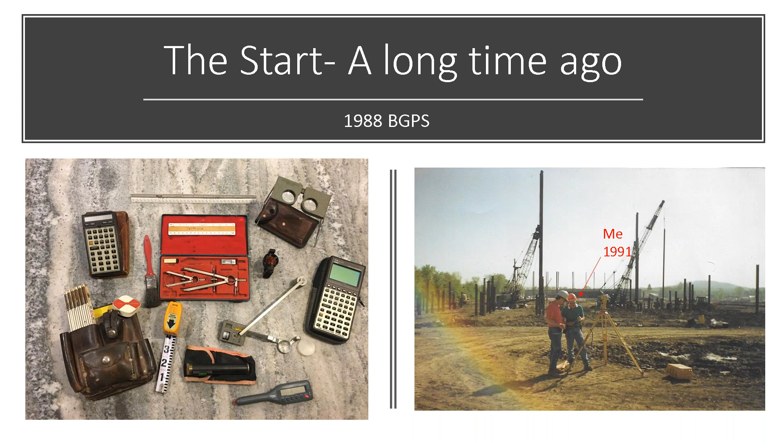What I do today is a lot of drone technology, training on how to fly drones, proper setup of your site with GCPs, making sure your GCPs are inside your flight, to processing the drone data through UAS Master, and beta testing 5.4 right now, where you'll be able to process your DJI drone data directly inside 5.4.

That's going to be a game changer. I also do custom corporate training. Here's a very large company, countrywide in the United States, that paid me for a month to come in every Friday and Saturday, and I trained every single division of their company on the use of Business Center.

To me speaking here at Trimble Dimensions, this one is on tips and tricks of 3D modeling. That was one of the things I did for years before SITECH took me on.

And I've been starting to get into the lecture scene at colleges. I did a lecture at ASU, Arizona State University, a couple of weeks ago, and spoke to the project management division about the uses of Trimble Business Center software and how to make a company successful, and why the old saying cash is king is incorrect. It should be cash flow is king.

So that's a little bit about me, but we're going to talk about what's going on for today's webinar, and this is going to be covering underground utilities. This is a big business. It's always been big, even from the days that I started, back in 1988. We've always needed to perform some form of as-built information.

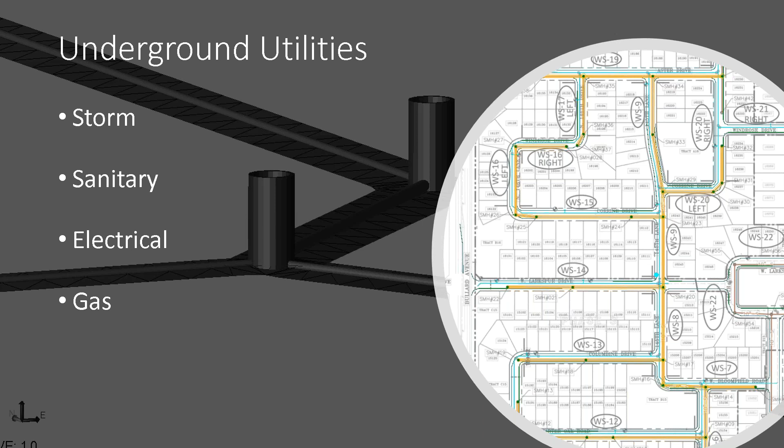So we're talking about storm, sanitary, electrical, gas, water, and communication lines. Some of these are open trenched, where you can do multiple ways of getting as-built, and some are trenches that are backfilled at the same time the lines are put in. That can become part of a daunting task of trying to figure out how to get an as-built done.

But with this technology, what you can see here and the as-builts we're going to talk about, you can come in with the site module of Trimble Business Center, build your pipe network, then take your as-built information from the field, and if you have line work, use the utility module to actually recreate the as-built information. So now you can have a 3D representation of your as-builts and a 3D representation of where the lines were supposed to be based upon the design.

And now you have multiple ways of visualizing and presenting to whatever entity you need to in regards to where the utilities are set.

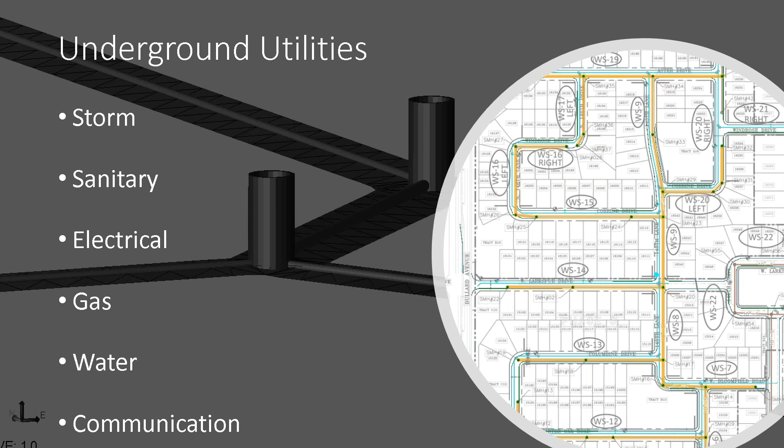Well, the project we're going to be talking about is something very unique. KAE was brought in to do a fiber optic line at the border wall in Arizona. The beautiful part is we were able to make our technology work here. You can see we have a head right here on the plow, and the spool of cable coming down, and they were burying the line at the exact same time they were plowing it in.

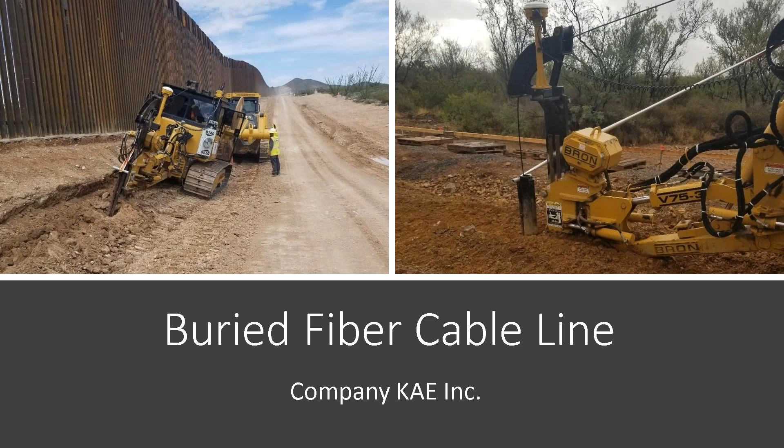So we had some requirements to meet. The project requirements were they needed to know the exact location of the fiber at burial. If you remember this picture, it was being buried the exact same time it was going in, so we needed to know that. We had to solve that question.

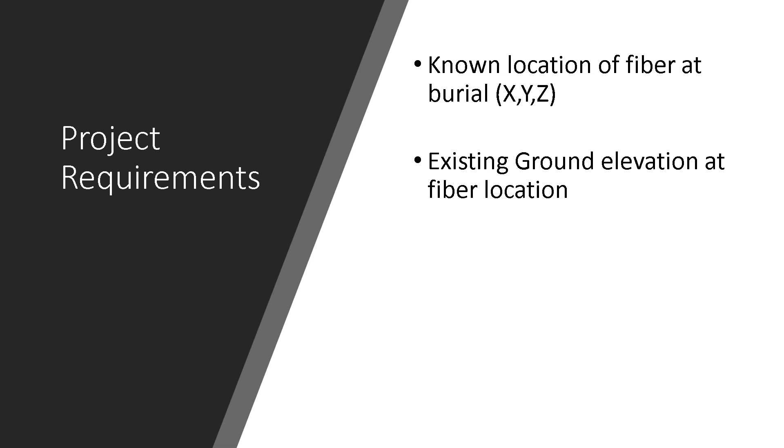The next thing they needed was a ground elevation at the fiber location. Another requirement was they wanted to know the depth of the fiber to finished design grade, because they had certain requirements that had to be met, to make sure these requirements were met in the field based upon the design location and where they were putting the fiber in.

Now, due to the ground out there, and I'll let the guys from KAE speak in a couple of seconds and explain what they were dealing with on the ground, it wasn't just a straightforward case of going along the line and putting it in. They hit some rock situations, and there was some existing burial of other foundations that nobody knew about.

So we had to actually relocate on the fly where that line was going. With the technology we came up with, we were able to know exactly where that line was placed, even when we had to make changes on the fly in the field, and then supply as-builts of the required information. So here are the requirements, and based on the technology I'm going to show you, this is what we were able to meet.

I'd like to give Adrian and Cyrus a little time here to speak about some of the issues they were concerned with when they knew they had to meet these requirements, until we were able to get this technology working. So I'm going to pass it over to them - if they can chirp in, fill us in a little, give us more scope for the project, and then I'll continue on.

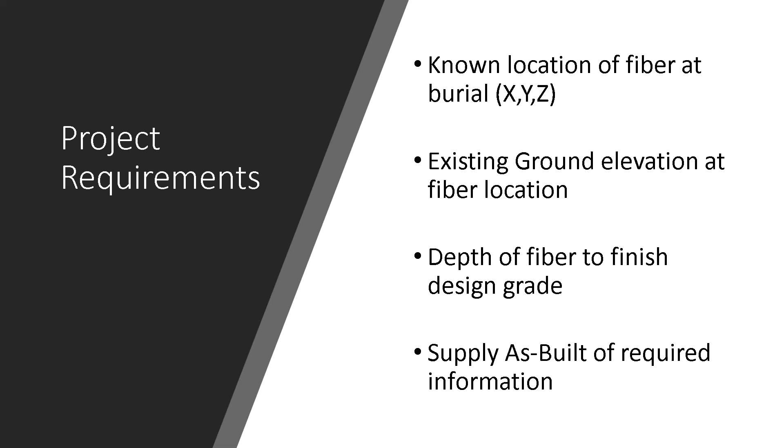So here are the requirements, and the software we use to generate this information, as you can see here, is Trimble Business Center - it's the hub. It's where the design came in, and where the files came in from the contractor that KAE was working for. We were able to compile all of that in Business Center, and from there we were able to push that out to the field and put it into the machines.

And then from the machines, it came into WorksOS, where on a daily basis anybody can log in and see where they're working, and get quick reviews based on where the line is relative to the design surface, to see if they're meeting requirements before you even start bringing in your as-built information. Then right from WorksOS, we were bringing it back into Business Center, which is where we were creating the as-built information.

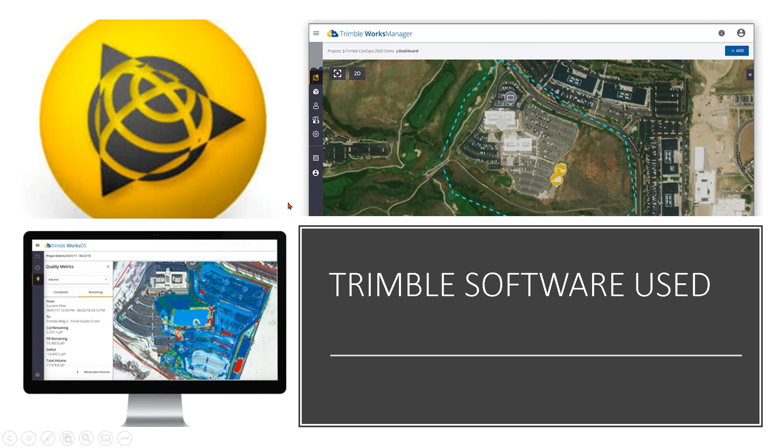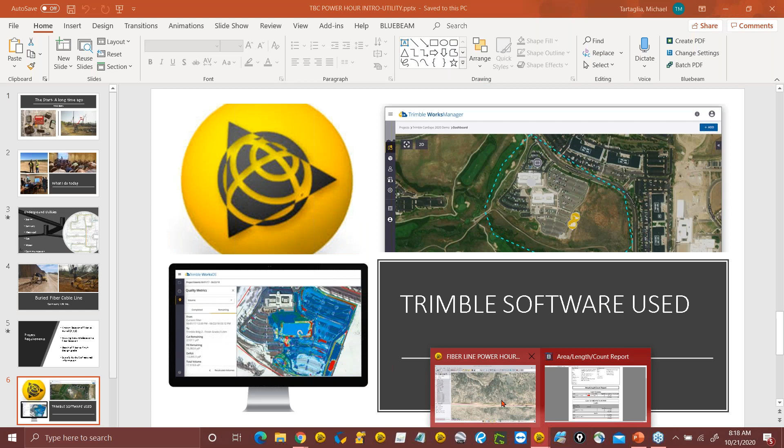So as you can see here, this is what I call the triangle of success for really any construction company. This is where you're going to know if cash is king or cash flow is king - it's right through this trio, and it's going to help you out immensely. These are the three products I'm going to be talking about in the upcoming part of my presentation, so I'm going to flip over now and come into Business Center, which is the hub of everything here.

So using Business Center is a fabulous tool, and we use it for everything, and it can be used for everything. Now, the key thing is when you do things like this, you need to be very well organized. I gotta admit, one of the most daunting tasks of me working with Adrian at KAE was getting the setup, getting the layers correct, so everything came in correctly, getting organized on the management.

Now, this isn't their full project. This is something that I was working with them on, so I took part of their project and was working with it. But what you'll see here is the use of groups to keep everything organized.

So you can see right here, everything is done by date. Very important for what we're going to be needing to extract from this information. So by Adrian having this information all nice, neat, and organized, if Cyrus needed to come to him and say, hey, I need to know on this particular date, can you pull me information like what Cyrus mentioned? Adrian can go in, he can pull him anything that he needed right there at his fingertips.

Again, this could be done on a daily basis because with the use of WorksOS and WorksManager and Business Center, at the end of the day, all that information from the machine and the data collector could already be pushed right into Business Center. So there have been times where Adrian has come in the next morning and has produced as-built information for what they did the day before.

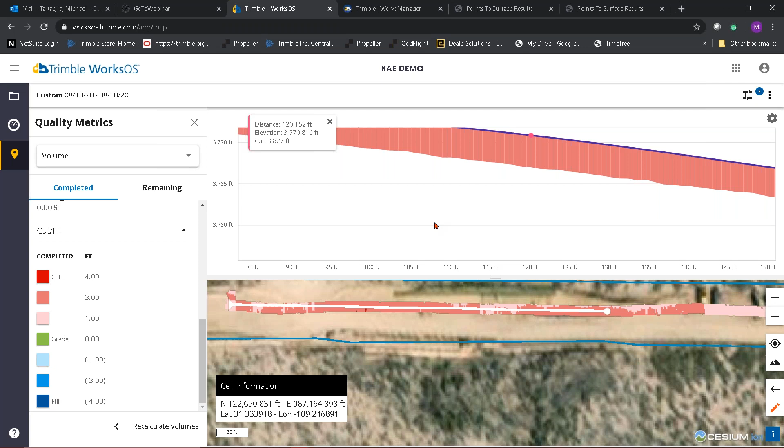So here, you're going to be able to get a visual very quickly on what is actually taking place in the field. Also, the cool thing about this is they're going to be able to monitor the equipment, the time of day, and the elevation, and they'll be able to follow the direction. You can see here, by looking at the timestamp, how fast they're actually moving, putting this line in the ground. So you're going to be able to get this real-time information coming in to here from the machine, so now you can monitor this.

Now, what everybody's probably saying is, hey, this trench looks a little wide for that plow. And yes, it is. The reason for that is, if we went back to the picture of the plow, you see how skinny that plow is—it's very hard to find and monitor. So what we did is we took that edge of the plow, and the center of the plow, and projected those same points out for a certain number of feet. We were able to visually see this, because when you're zoomed in and you have something that's only 6 inches wide, you're not going to be able to find it pretty quickly. So we're able to come in and do this.

You also have the ability to set up regions. So I set up a region here, and we can set that up as a filter. If there's a question, I can come in, put a region around here, create a filter, and then call my guy in the field and say, hey, go up here, go to this filter, and it'll zoom them in on the area that I had some concern with.

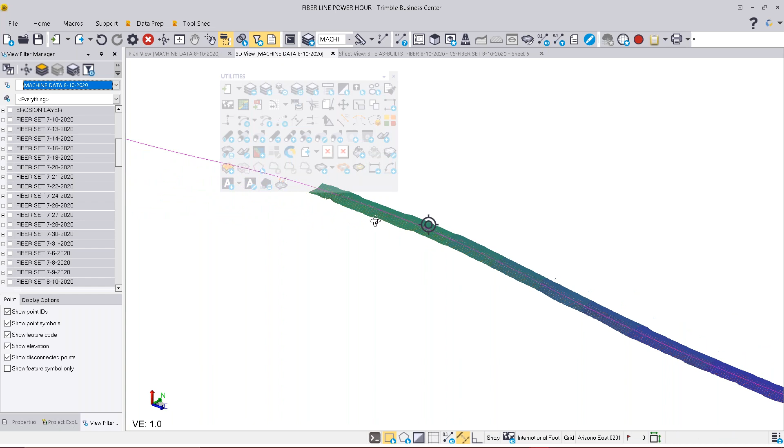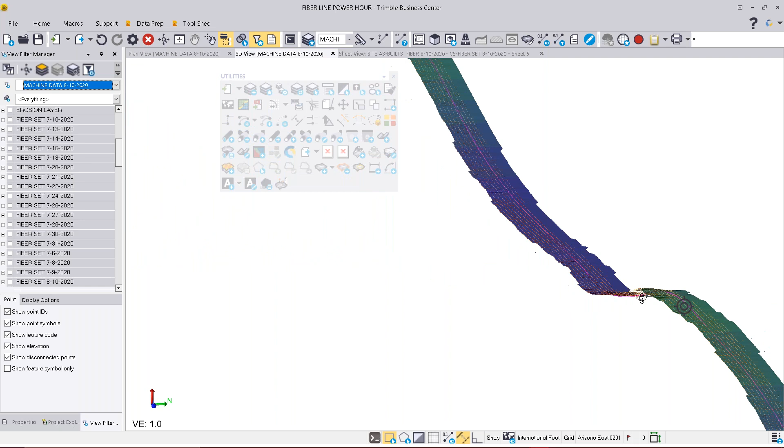From here, we'll take a look at a 3D view. So I'll open up the 3D, and what you'll be able to see here is the design line. The purple is the design line that was given to us from the company that they were working for. You can see that this line right here is set to be at the requirement of the depth that's needed, and the ground changes quite a bit as we are going through here. But if you look at this, you'll see we're pretty much following right along the design of this project with getting this information in. So now from here, we know the X, Y, and Z location of that trench—so we met one requirement.

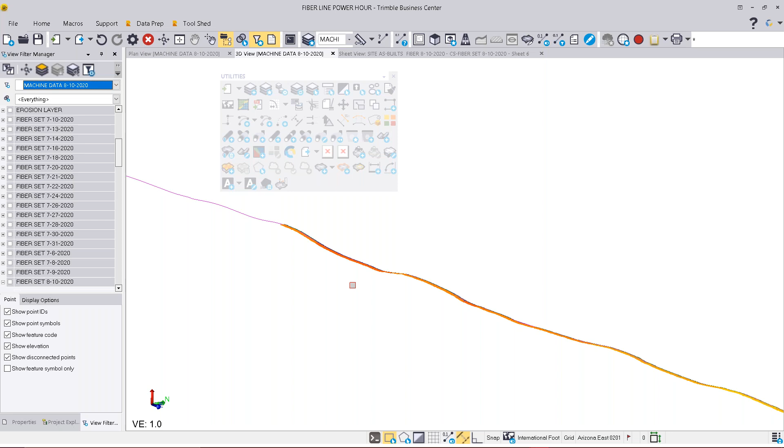We needed to know X, Y, and Z of the depth of that fiber optic line as it was being buried at the same time. So here's requirement number one. We have a visual for that.

What Adrian was able to do at that point in time is now meet requirement number two, which was we need to know what the existing ground is. Anybody out here that's a surveyor that's been out in the field for a while knows that getting ground information is pretty simple. Got the rover today, just fire up the rover and go out and shoot.

So what KAE has is they have a guy out in the field. He will, as they're digging the trench, go out and follow behind and start doing ground shots every 50 feet along the buried part of the trench. So we can now monitor what the ground was at that point in time when the line was buried.

So we're going to come in and we'll start looking at the fiber set. So you see here we have the fiber set for that day. And I'll come down here and here is the fiber location information. I'll just start walking you through really quick the steps and the workflow that Adrian is following.

So because everything is tied into WorksOS, Adrian is able to grab the data collector information and bring the point information into Business Center of where the ground shots were actually taken. So now we have X, Y, and Z on the ground.

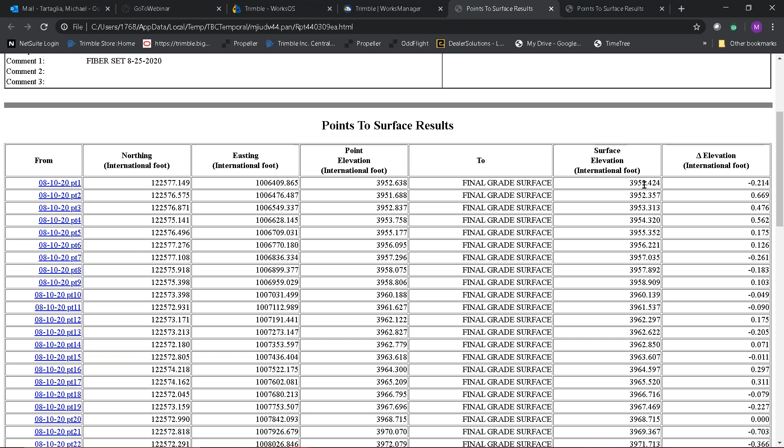Which then showed him the ground shot taken by the surveyor, the northing, easting, and elevation, what it was being compared to, the surface elevation at that location, and what the ground was at the time of burial.

Okay, so he was able to bring this information in and meet requirement number two. This whole process that I'm showing you right now would probably take somebody, after they're trained - and I'll let Adrian speak a little bit about this too - about an hour to 2 hours of time in the morning to get this part done, and you're able to hand over to your overseeing company your as-built information at that point in time.

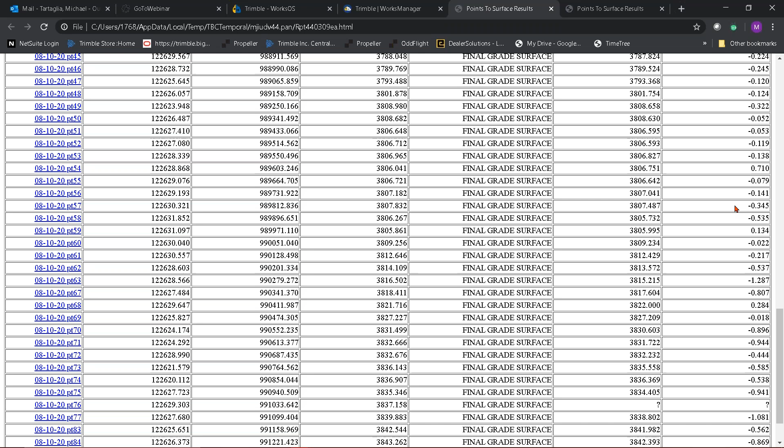So he would create this, then back in Business Center, he would come in, and what we would use is the tool called line string through points. And what we would do at that point in time is create a line of where the ground is.

Now this is going to be important, and you'll see why, because we needed to create other as-built data, as in cross sections as well as profiles. So you'll see here in a few minutes why creating that line is so important.

Now, to meet the requirement, we know the X, Y, and Z of the trench, but now what we need to do is meet the requirement of what is the depth of that particular line that was buried. So what we were able to do is use a tool.

We were able to take this line here, and we dropped it down onto another layer and made it take on the elevation of the surface that was generated by the plow. And what that gave us was our actual line. So now that line has true X, Y, and Z location based upon the surface from the plow.

Once we had that, all Adrian had to do is create fiber points, or points set to the line. So we used the tool where we came in and said points at interval, and he set up an interval, and we created points along that line.

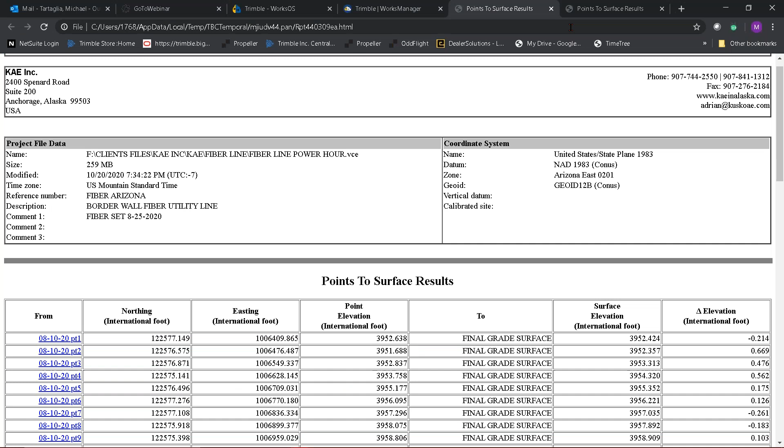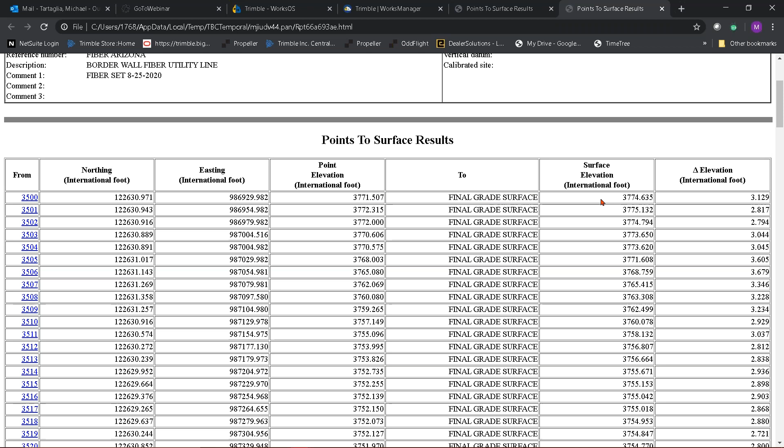From there, we clicked on points to surface, which led us to be able to create this point to surface report. And now what we have is northing, easting, elevation of the actual line based upon true information that came from the machine that was brought in to the design surface, and what the burial was at those locations along that line. So now, just that quickly, they have been able to meet a part of the requirement.

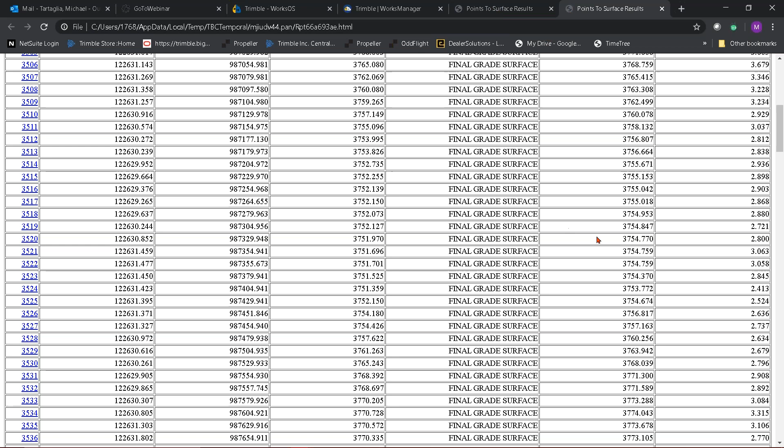I need to have some form of as-built information of what went on. So now Adrian has these two reports. He's able to generate these. From there, he'll come back into Business Center. And because everything is nice and neat on its own layer and layer grouped, he was able to come in and use the area and length report.

He was able to come in, pick the layer or just pick the line, select that he wanted just the length, wanted to display in report view, and what comes up is he was able to instantly get a report. Because everything is organized and layered and grouped correctly, he was able to generate a report of how many lineal feet they did during that time frame on 8/10 on the north side of the project.

What he was able to do is take these two pieces of information, create PDF files for them, send them over to the contractor that they were working for, and meet a requirement of letting them know pretty much on a daily basis where they were and how many lineal feet they did on a daily basis. So with this tool, they were able to meet these particular requirements.

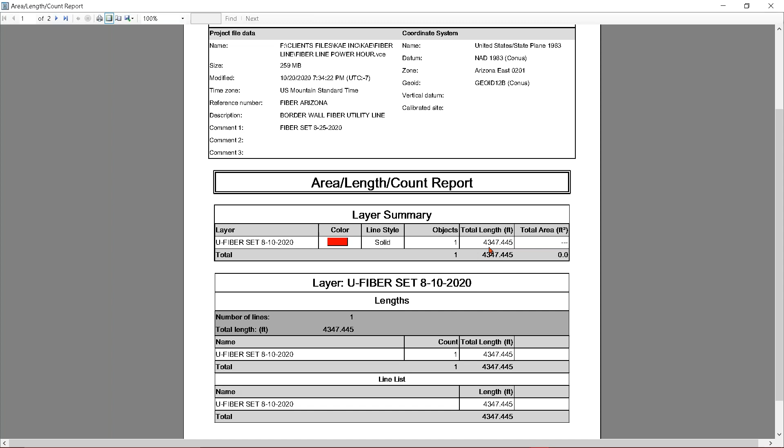Now, the cool part about Business Center here is we can also go in the reverse direction. So if there was any design changes in here, then we would be able to take this and send and publish this right back to, and for some reason my icon is not showing up this morning, we can send this directly back to WorksOS.

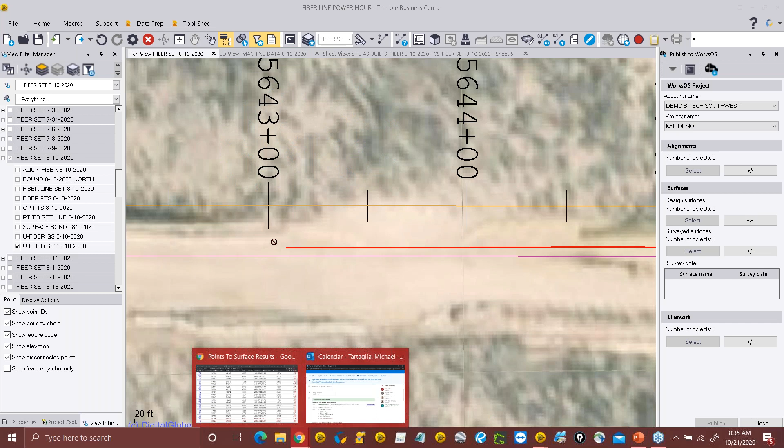So if there's an updated surface and they need to monitor that back in the field over in here, so they're able to get updated depth numbers, they'd be able to do that.

So on any project that you may have that has different designs, let's look at a design build. You've got a design build project, everything is changing on a daily basis. With the use of Business Center and these tools, and you may have underground utilities that you need to monitor, you're able to send things back and forth.

You can also send an updated line file. So if the location changed, we can send a different location, and that could be sent up through WorksOS or WorksManager, and that could be updated in the machine.

So what you're able to do on a daily basis, no matter what you're taking in, or you're taking as-built in, you're modifying designs for better as-built information to go back out because things have changed. The guy in the office is going to be able to, with these three products, control a whole project.

Also, by controlling this whole project, the guy in the office is also going to be able to monitor, are they using the correct surface? Are they using the correct design? As well as the field is going to be able to.

So they would be able to log in and immediately there'd be a yellow flag pop up and say, machine's using old design. So you can call in, call your operator, say, hey, you're using the old design. Stop. Do not put any more utility in. If you start putting the utilities in, you need to switch to the other design.

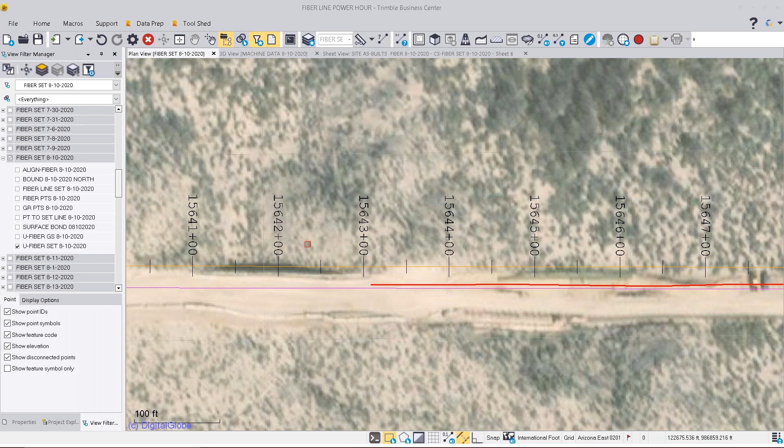So we are now able to not only give the lineal footage of the line of pipe that they did, but now Adrian can also make sure that his starting point and ending point stationing match the starting and ending point stationing of what his site superintendent marked down, based upon the stationing that's marked out into the field. With this information, we were then able to start

creating further as-built information to meet some of the other requirements. Because this is such a long project, over 40 miles worth of work that they had to do, we could not create one solid alignment to handle everything at one time. It was becoming a very daunting task, and it was putting a lot of horsepower and drag onto the computers.

So what we started to do is break everything out into its own alignment. You'll see here that we now have the design set up for an alignment, and we now have the fiber. If I look at this in profile view here, we'll see that this line now follows the exact topography of what they were using to set this on.

And then this had a design elevation on it. So if we take a look at this in horizontal line, we'll take a look at this in profile view here. We can see that this original alignment we used also had the original design requirement elevations on it.

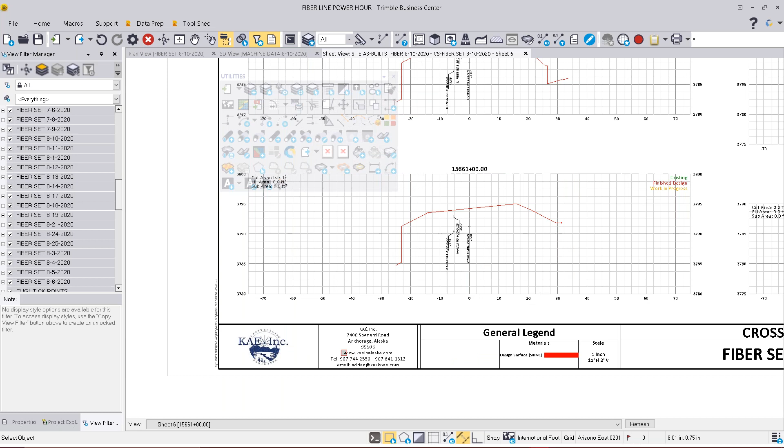What this has allowed us to be able to do, let me come back to my view filter, is create as-built sheets. So I'm going to come in, and right over here, you'll see that we were able to create as-built, with their logo, their company information, the information they wanted in their legend, the scale, cross-section, the date, and their information is all filled out in here.

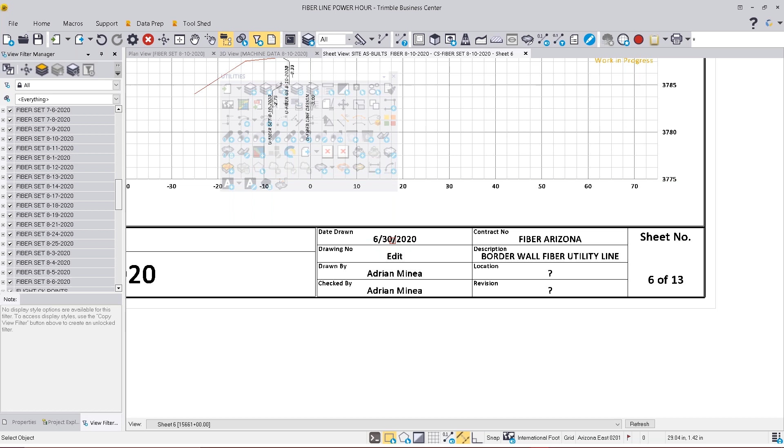My business center is a different date. I forgot to change it. That's why this came out as a different date.

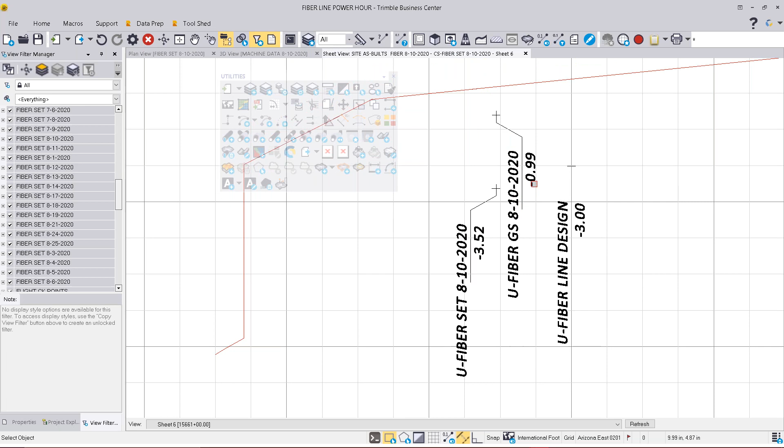What you're going to see by use of this in this cross-section is we can now show, in cross-sectional view at that station, the design fiber set for 3 feet, the fiber set on 810, the depth below the design grade, and where the grade was at the time of placement. We'll be able to do this on every single cross-section.

So not only did we meet the requirement multiple times by doing the surface point to surface report, giving them the area and length report, but now we're also able to generate visuals.

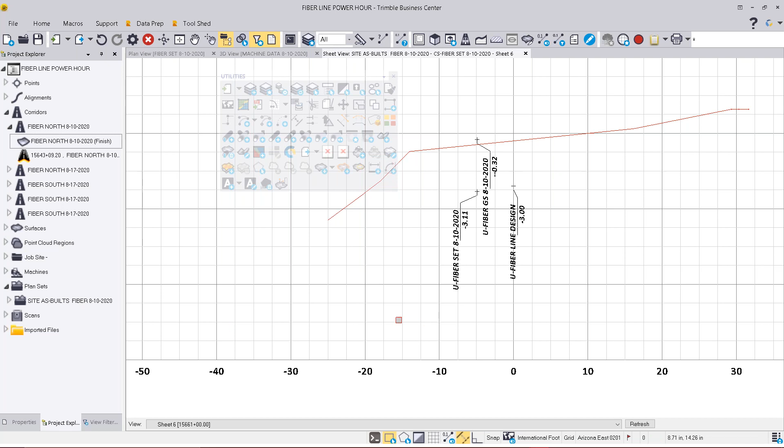Because of Business Center and the way we have this set up and the way we're running this, Adrian is going to be able to, and has been able to, do this on a daily basis. He can print out the points off surface report, do the area and length, then immediately go in, create the corridor, attach those 3 lines to it. Then, since we already have his templates set up and plan sheets developed for him, all he has to do is drop in a new set of plan sheets, set it up for the date he wants, attach the information he needs, and now he has as-built drawings for that day right there, because everything is organized and put into the proper way of generating a project.

Now, to think about this, if I had to do this in the olden days, this would not have been almost on a daily basis. This would have been at the end of the very project of what is going on. So with the technology and what you can do, it is mind blowing.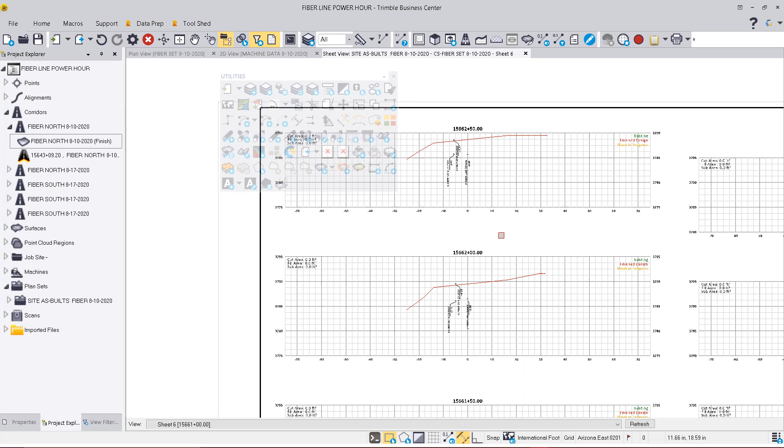If you really have a guy in the field that's ready to embrace the technology, somebody in the office willing to learn and absorb or has Business Center skills, and you work with a very good SITECH and people that really know how the technology works, you'll be able to generate all of this in a heartbeat.

So all our sheets are already created. We can switch over. I'll go to sheet 7, and you'll see here sheet 7 is created. But then what they also wanted, and they needed to have, plan and profile sheets. So I'll come over here and we'll show a plan profile sheet.

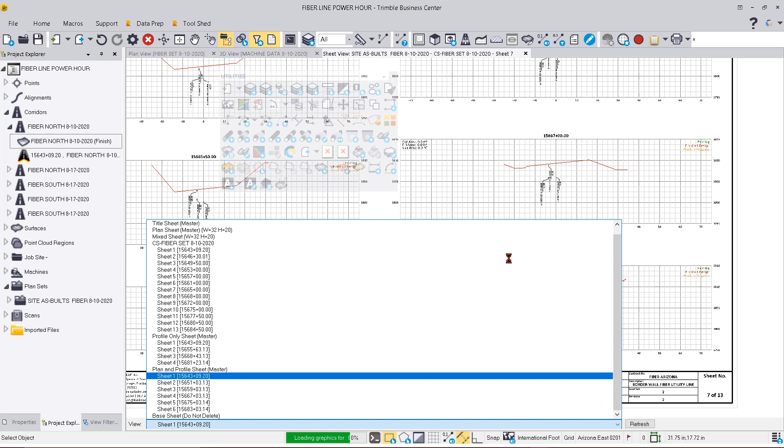You can see that this plan profile sheet is set up with the legend that they want, the scale that this is going to be plotted at. Again, their information is in here. And what you'll see in here is...

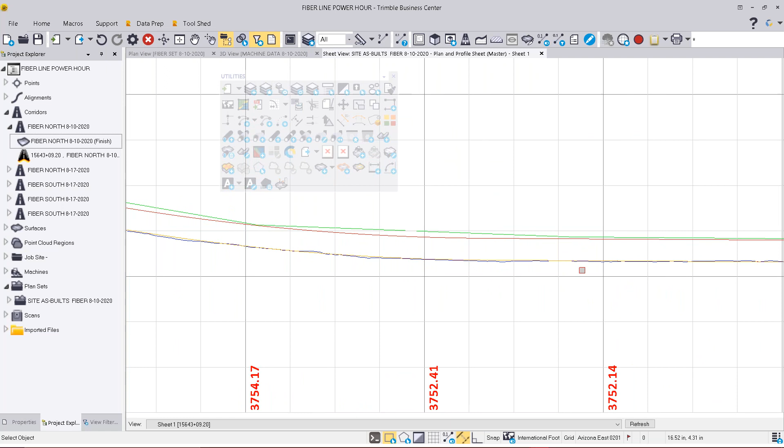Based upon the legend, fiber set - you can see the blue line here. This is where the fiber was actually set based upon the information pulled directly from the machine. Fiber design: this is the design line based upon dropping that straight down 3 feet below the surface at that location. The green line here is the actual ground at time of placement.

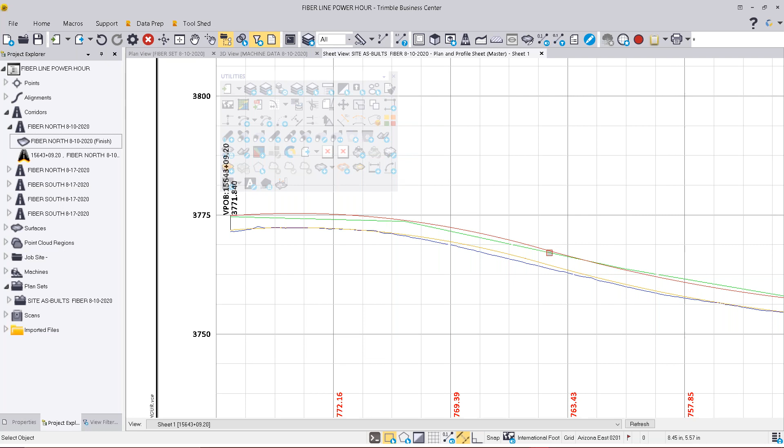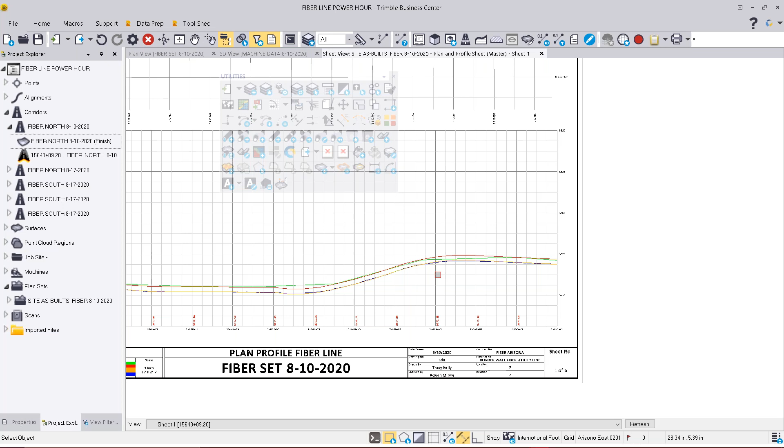And the red line is the actual final design surface of what is going to be out there when they come over. So when the project's over, that's going to be where the final design surface is. Up on the top here, he's able to label the different fiber lines - that's the design line, that's the fiber set. This is the baseline for the stationing that was being used at that time.

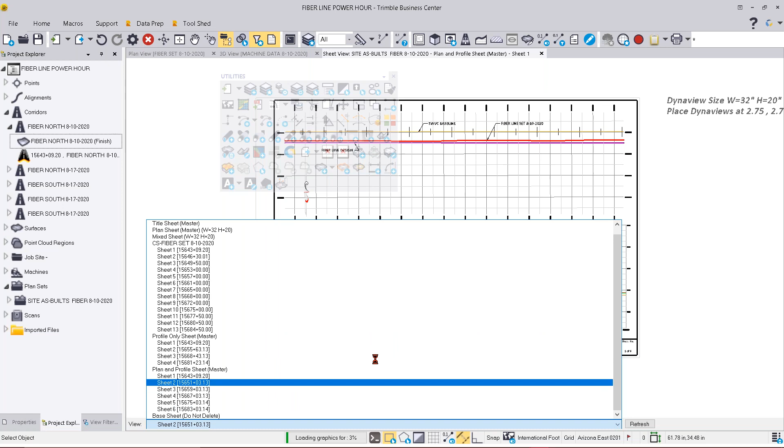Again, all these plot sheets are already set up, so all we have to do is walk through and you'll see that the text and everything is there. May have to just move that down a little bit, but these are set and ready to go and present to people. You create a PDF file of this, and now you can ship all your information over to whoever you need to.

The other beautiful part about this is, because it's Business Center and because Southwest Valley is using Business Center, I know Adrian has been able to VCL some of the files over to the people at Southwest Valley. They were able to bring it into their Business Center and do whatever reporting they needed to do in order to meet the requirements they needed to meet.

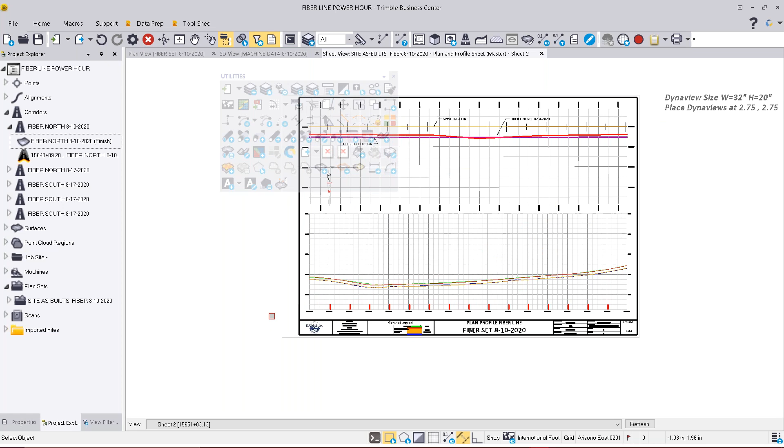So having this right here, but the cool part about having this one set up, this is also set up to a view filter right here.

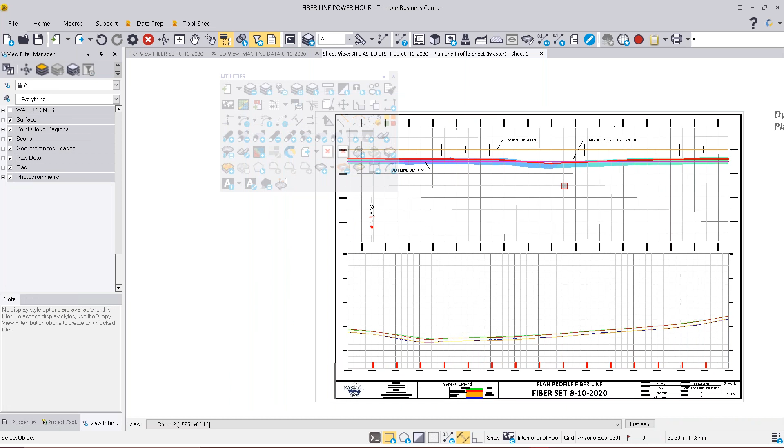So by setting things up correctly, I could come in and say, you know what, I want to have that surface show up in my plot. So now if I come back over to my plot sheet, you'll see that instantly I can show the actual surface in there of where the machine tracking actually happened along that route for the placement of this.

So by being organized and using the potential of Business Center, you can make your project very, very successful. So that's what we did. I'm gonna have Adrian chirp in here a little bit and explain what he's been doing and his learning curve in Business Center, and then we'll pass it over for any questions. So Adrian, is there anything you would like to add, or Cyrus, anything you'd like to add to the presentation that I just showed?

Good morning, Mike. This is Adrian. Good morning, everyone. First of all, I would like to thank Mike. He's my mentor, and we passed any kind of language barrier, and he's been teaching me from the beginning, setting up the workflow. That's really, really important. And for me, it's been a really tough transition using other software compared to Trimble Business Center.

At the beginning, I've been a little bit lost, but Mike organized everything for me, organized all the tools and set up all the categories. And in 5 sessions, I was able to do my current job, to do all the daily reports and send all the weekly reports on time. All the time we need to add more in our reports, and all the time I'm learning something new, and that's really important. It's a really complex software.

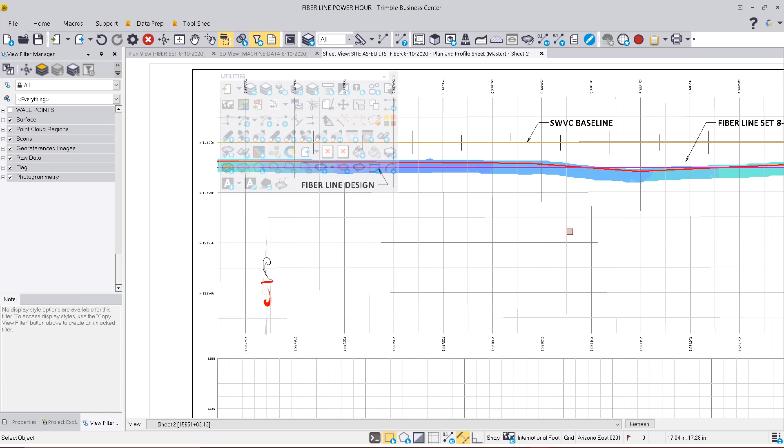Okay, all right. Thank you, Mike, once again, that was very informative. Thank you, Cyrus. Thank you, Adrian, for your time and for your expertise. Myself, coming from the subsurface utility world, that was very, very informative, just the technology and the capabilities that are available to provide these prints. And I think, like Mike was saying, these as-builts that we have created, that was something that was done at the end, and the fact that they can do this right at the beginning, man, it just blows my mind. So I just want to tip my hat to the team. I hope that was as informative for everyone else as it was for myself.

But if you're looking to dive deeper into this, what you're going to need to create the data is Trimble Business Center version 5.32 and this site modeling module. To record the data, you're going to need WorksOS, and to transmit that data, you'll need WorksManager.

For a quick overview of what is needed to see the data in WorksOS: a machine with a machine or grade control system, back office connectivity, access to the CAL files, and a current version of a WorksOS user license. Please reach out to your local rep for more information on what you specifically need to see this data.